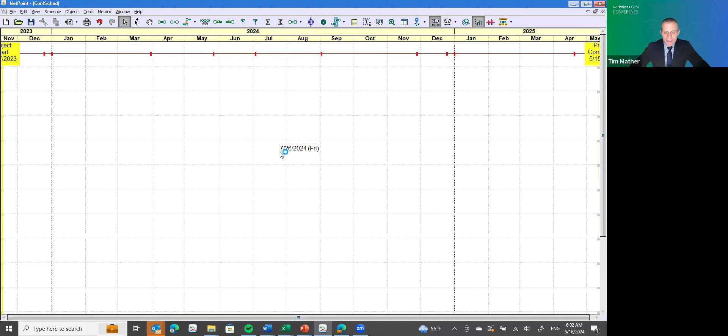Here we are in a blank canvas of NetPoint. Before we get into that, I'm just going to talk about myself a little bit and describe what we're going to do in the training.

I'm Tim Mather, as you can see from my screen, and I'm the COO of PMA Technologies. I've been involved with NetPoint since it was conceived of in the mid-2000s, 2005, 2006 maybe. We started working on it, first release 2008, and it's been commercial since then. Just a great tool. I love the way people engage with NetPoint and the way it offers a visual, interactive, graphical representation of a schedule, which is obviously an unmet need until NetPoint came along within the industry.

So today in our training, we're just going to talk about, from a tabula rasa, a blank tablet here, what are the first steps you should do when you're putting a NetPoint schedule together. And then we're going to move on to how do you add objects to the screen, and how do you set calendars if you want multiple calendars in your project. We're also going to talk about how to link objects together, how to push activities around and show how the interactivity works.

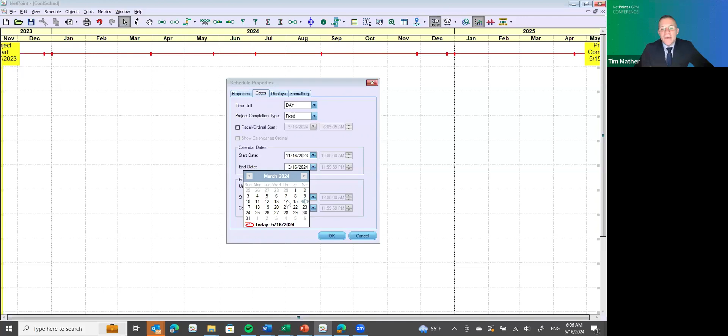One trick that is helpful to know is if you make an adjustment here, let's say that we want to go to 2025 instead of 2024, you can make that adjustment just with this arrow button here. So you don't have to go month by month through the calendar to adjust it. But if you want to go month by month, you can do it this way.

And then you have to actually pick a date on the calendar in order for it to fill in. So once you've adjusted those, if you don't have any objects yet on your screen, if you haven't placed any objects on the canvas, then you can use this autofill function. What that will do is it will adjust the date of the project start and project end so it fits within your new calendar dates. That's a little bit of a time saver.

While I'm here, I'll talk about time units. We typically schedule in days, but there are situations where you may have a very long planning window, like maybe 10 or 15 years, in which case maybe you want to go by quarter or by month.

And so the precision's a little lower, but you can get the whole plan right there on the canvas. I'm going to stick with days for our example. So now you have the blank canvas, you've got your calendar set, and you can just click OK here.

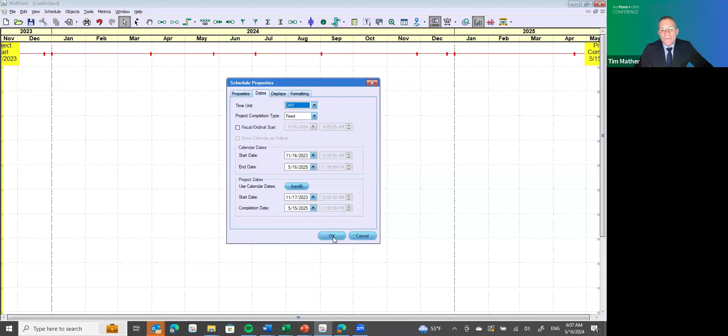And then we're going to move to look at the print layout. Why, Tim, are you talking about print layout at the very start of this project? It's because NetPoint is truly WYSIWYG, and a WYSIWYG tool means that what you see is what you get. And what you want to do is make sure that the tool is aligned with how you want it to print out at the end.

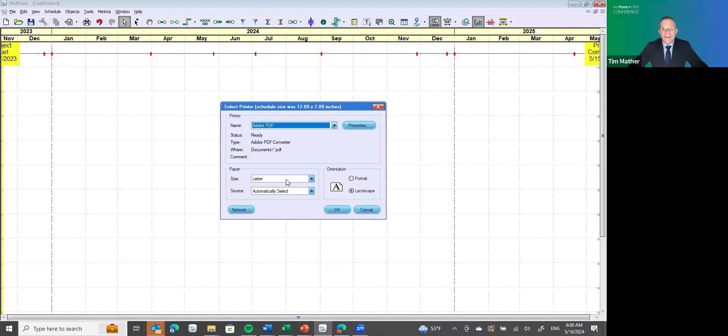So for instance, if you have a stakeholder who says, I only want 8.5 by 11, then make sure that your document here in NetPoint, your schedule, is set up to be 8.5 by 11. I usually switch to Adobe because that's kind of a universal print driver, easier to share around to people. So I'm going to leave this at letter size, but once you're in Adobe, you could make it a plotter size or whatever works. The thing you don't want to do is build a plan and then change the size of the page. So that's an important first step.

So now we have this blank canvas. We have the printer page set up. We have the calendar set up. And now we can start adding activities to the canvas.

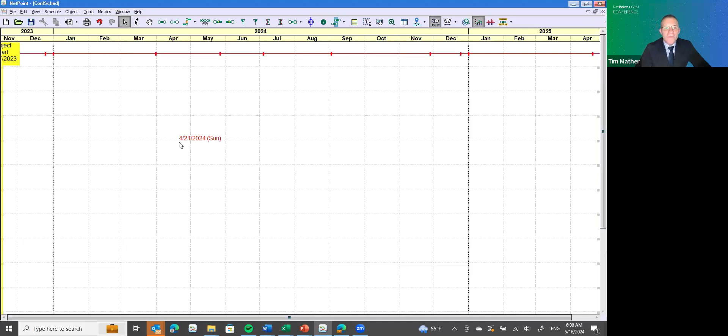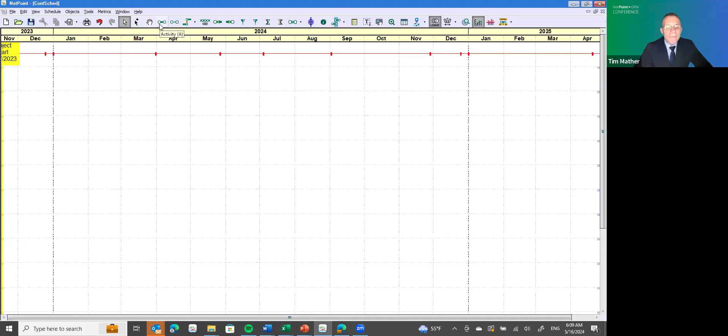So up here across the top, you'll see a bunch of little buttons and banners and icons, and I'm going to run through a few of them, demonstrating how they're used while we use the tool. So I have right now selected this arrow, the select tool. There's a select plus where you can select multiple items at the same time. And then there's also a hand to kind of move around the canvas. But I'm going to stick with this select tool and select an activity.

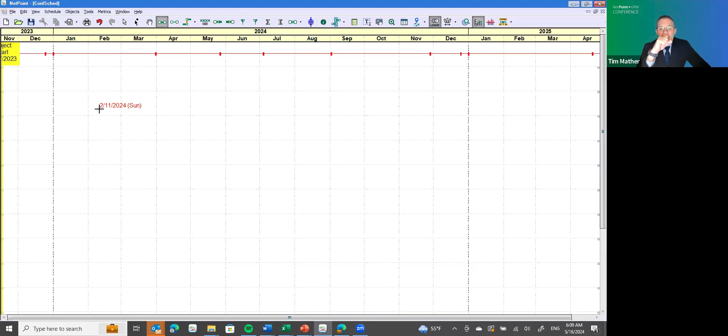Once you've done that, you come down here and you'll start to see that the crosshairs are giving you a day of the week, and they're also giving you the date. That's helpful when you're planning. You'll also see, for instance, here, 2/11/24, that's showing red, and it's red on a Sunday. That is true because we have a 5-day work calendar here, so Saturdays and Sundays are not work days, they're non-work days.

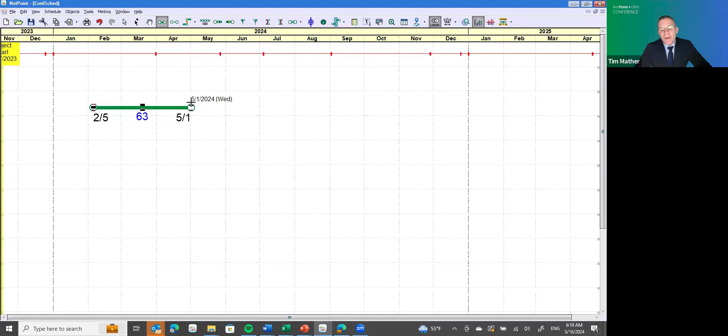Once you find where you want your activity to start, you click the left mouse button and then start dragging that activity to the right, and it's going to show you the duration and the start and finish date as you drag it out to the right. And once you've reached that target date or duration, you can just let go of the mouse and then it will give you an opportunity to enter a description for that activity.

So the description could be something creative like activity 1. Actually, no, let's not do that. Let's do something better than that. Let's do permits. So now you've got your first activity on the canvas, permits, and it's a 63-day activity starting on 2/5, ending on 5/1.

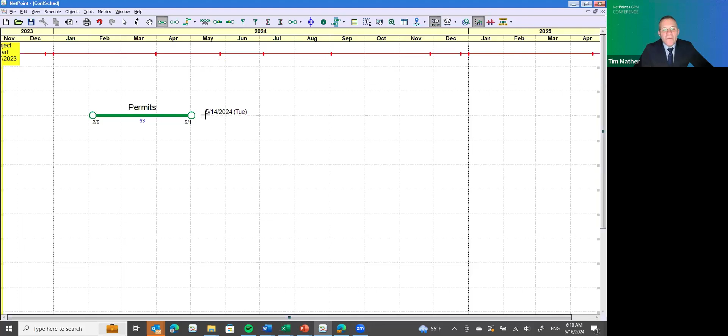Next up, let's talk about adding a second activity. You can see here, activity is already selected as your power tool. So we're going to just drop our mouse down here and drag to the right, and we'll say clear site. We got a green field here. There you go. Now we have two activities on the canvas, and one's following the other on the same horizontal plane.

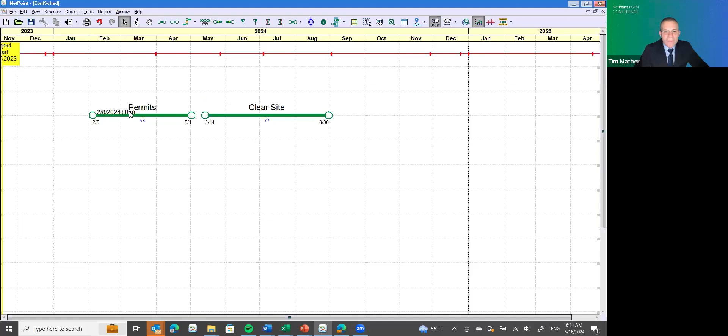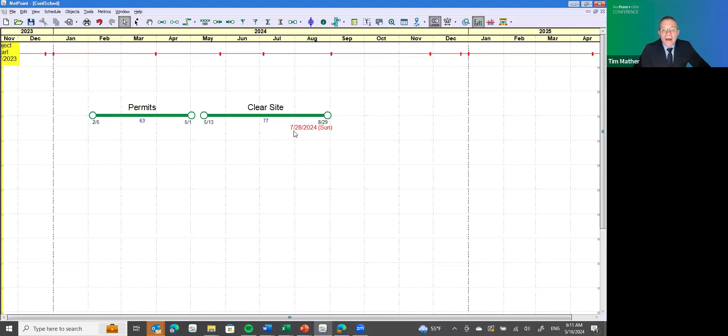That's one of the unique and wonderful things about NetPoint, that you can plan multiple activities on the same horizontal plane, which has two big advantages right off the top. One is it saves a lot of room, because if you can plan 5 activities across the schedule this way, then you're saving going 5 down this way. So you end up with a much more efficient use of space for your planning. Also, it's easier for non-schedulers to follow activity, this finishes and then this one starts, when they're one right after the other.

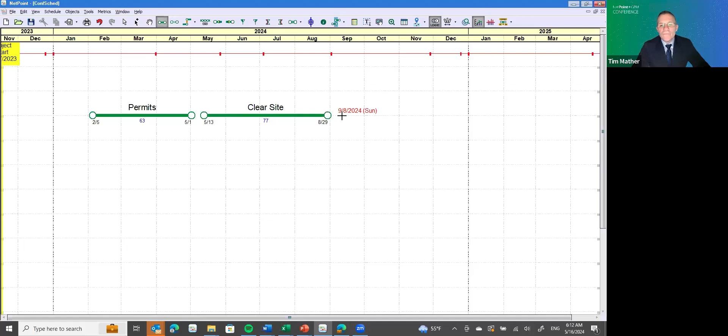So let's add a third activity. We're going to do some foundation work.

Spelling is not my strong suit, folks, so if I get anything wrong, you'll just have to forgive me. We don't have spell check yet in NetPoint, but I keep asking for it.

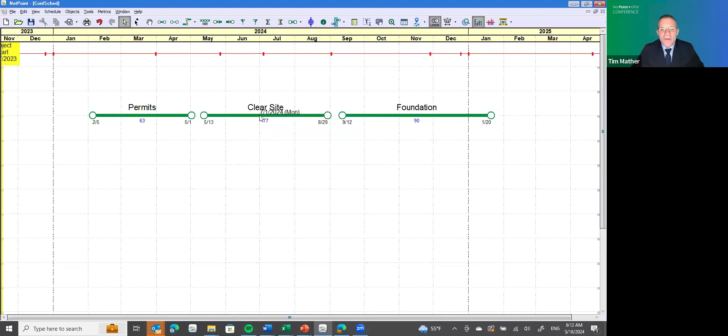So now we're going to see we've got these 3 activities. They all have start and finish dates. They all have durations. But if you grab like clear site and start to push it back, it doesn't have any impact on permits because permits is not yet linked to clear site.

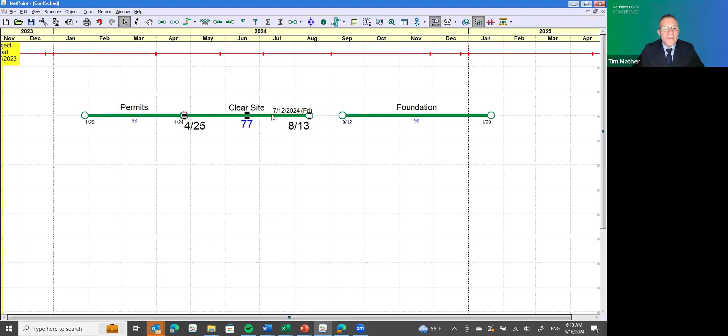Now, how do we link these together? We're going to link them together by, I like to do it this way, just drag a box around the 2 activities and click your link button up here. And now they're linked. So now if clear site starts to push back, it's going to start pushing permits because they have a relationship, a logical relationship, finish to start.

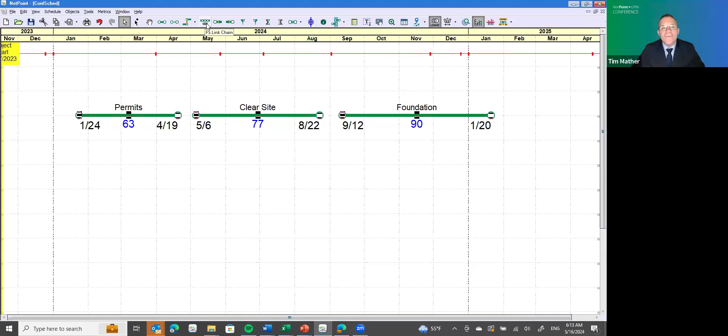Now I'm going to break that relationship just by selecting it and hitting the delete button. Now we're back to no relationships so that I can show you the link chain. So we have a finish to start chain link way that saves you some time and energy if you're linking together multiple finish to starts. That's what this little chain link thing is here. Finish to start chain link. So you click that once you've selected your activities, and then they're all linked together now, finish to start.

And so if project start date starts to crawl forward, then you can start to push permits. That'll start to push clear site and foundation. And now you have this chain all linked up. What if we wanted to demonstrate at a higher level something like the end of this? We're going to call this phase 1. So we're going to create a finish milestone, and we're going to link that to the end of foundation, phase 1.

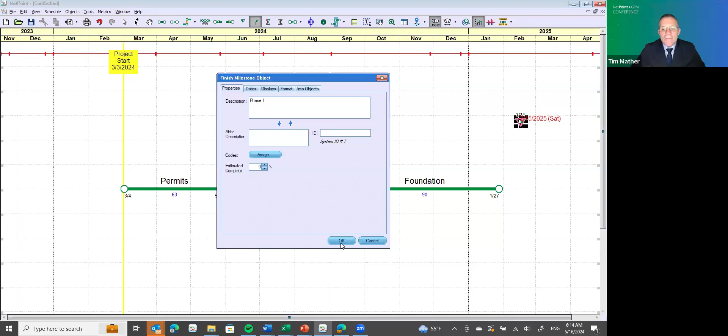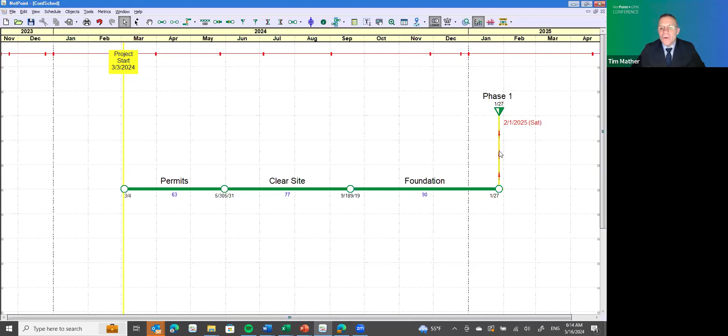So now that I have that finish milestone, it's just floating out in space. It's not connected to anything. But if I connect it back to foundation, you'll see that it's going to snap back to the end of foundation. And so it's always going to track directly with the end of foundation. As foundation goes, so goes the end of phase 1, it being the last activity.

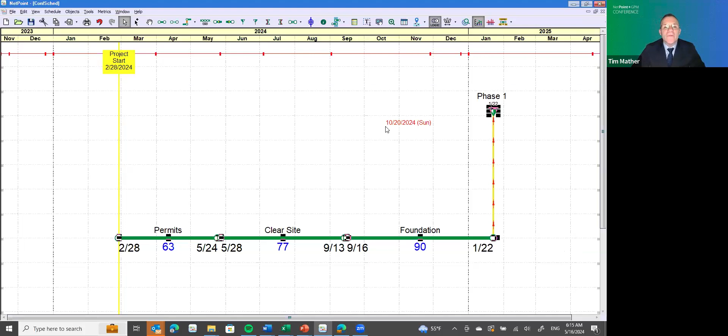So let's do this. Let's knock these down a couple more rows, and let's create a hammock that will demonstrate all the objects that are in phase 1. So you do that by clicking on this hammock tool after you've selected all of the activities you want to be in the hammock. And I'm going to start that on grid number 2. It's going to pop up there and ask for a description. I'm going to say phase 1. So now we have phase one hammock.

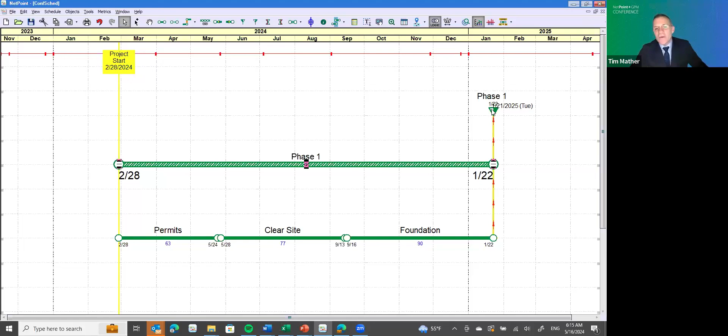We could actually move this down so it's in the mix after the milestone. So if you look at different levels, kind of, this bottom part could end up being a level 1, level 2 as you build it out. Up here, you've got a level 1 maybe, and then here a level 0 with just the milestones. So you can see almost different areas of the same schedule, different levels of detail.

So moving on from adding activities, let's talk about calendars. I want to bring up our calendar tool. You'll find a lot of this functionality right here in the tools menu, well organized there. And the verb here is usually manage, so we're going to manage some calendars. I'm currently using the US calendar for this schedule. You can use calendar days where there are no non-work days, and you can create your own calendar.

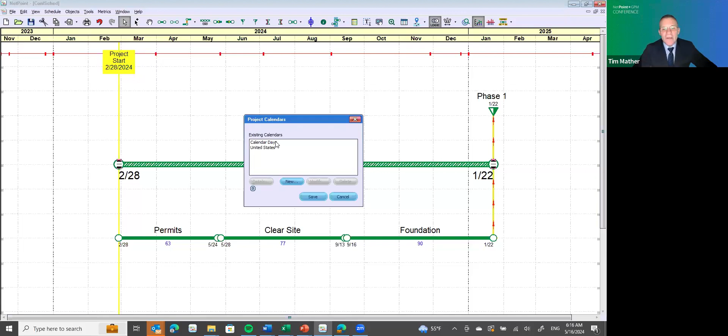So let's do that. Let's create a new calendar. And we're going to call this conference calendar, for lack of a better term. And then what you do is you use a template. So we have many countries in here with their kind of holiday schedule already pre-built.

Funny story, when I was working in Shanghai with a group, we brought up the calendar from China here, and there was open laughter in the classroom because China has a lot of different holidays that we did not have in our calendar. So that was an eye-opener.

So I'm just going to use the United States calendar here, and then you add to list. And what that does is it adds to your list all the holidays and days off that we have in the United States calendar, and it also selects the non-working days. So if you were happy with that, but in this case, because the conference is on Thursday, we're going to have a non-work day on Friday, so I'm going to leave that as a non-work day.

Also, I would be remiss if I didn't mention this really cool feature with weather days. You can go into NOAA and research like 5 or 10 years worth of weather history, and you can calculate how many non-work days, weather days you're going to have in any given month, and add it here.

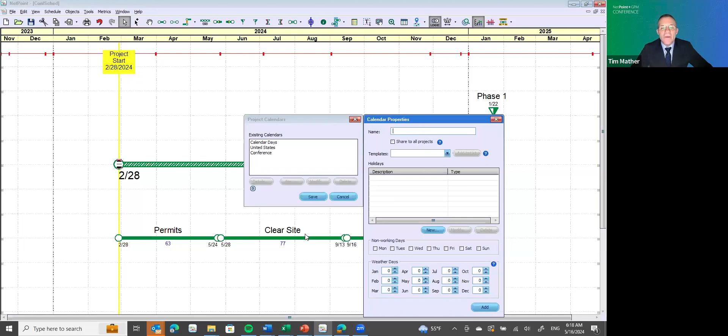And what the system will do is it will actually seed statistical sampling and drop those weather days into your calendar. Some will end up already on non-work days just because that's the way the world works. Sometimes it rains on the weekends, but it's a really cool feature that we added a few years back. So I'm going to go ahead and add this calendar. So now instead of just the 2 basic calendars, I have a 3rd calendar in the system.

And then if you wanted to apply that calendar, you could apply it system-wide or just to a particular activity. So if we wanted to apply that calendar to this one activity, then all you have to do is come in, go to your dates, and change your calendar for that activity. So now we have that conference option.

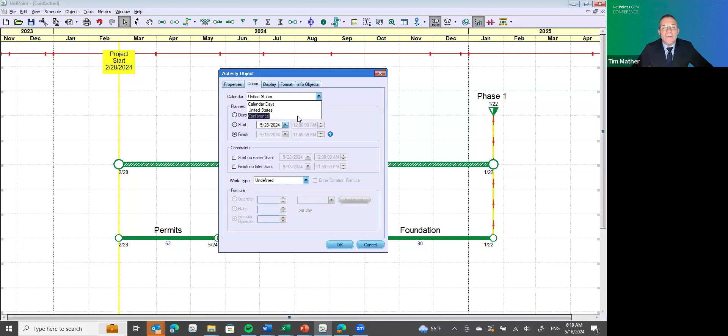So we've got a few objects. I haven't talked yet about embeds, which is a really cool feature of LDM, the logic diagram method. It's a way to do start to finish kind of relationships visually and graphically. So let's do a start to start here.

You'll notice in NetPoint, for instance, look at the milestones here. A finish milestone is colored in on the right, and a start milestone is colored in on the left. And you can see the same thing here with the start embed being yellow on the left and a finish embed being yellow on the right. So I'm going to do a start embed off clear site.

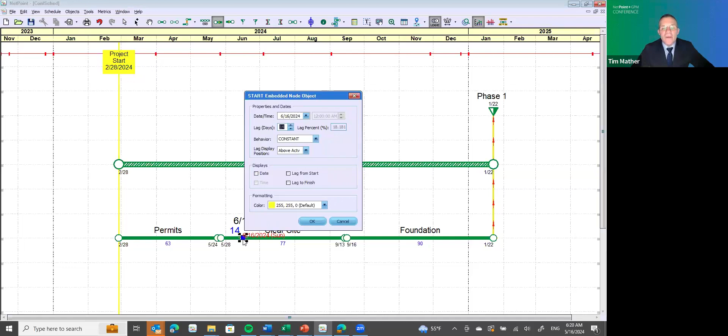And so now 14 days from the start of clear site, I now have a jumping off point for the start of another activity. And I'm going to add another activity below here in the next lane. And it can go just a little bit longer than clear site, and I'm going to call it fencing. So now we're going to grab that embed, and then I'm going to hold down my shift key and select fencing, and then I'm going to link these two together.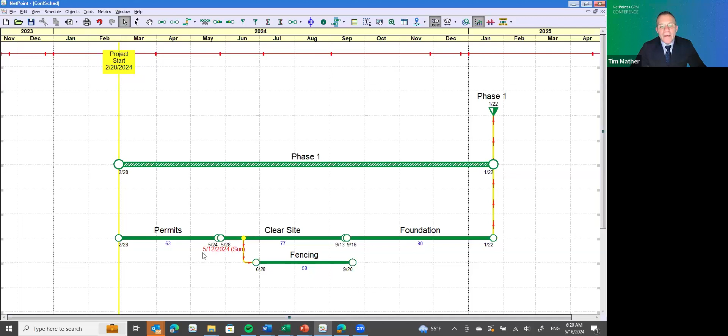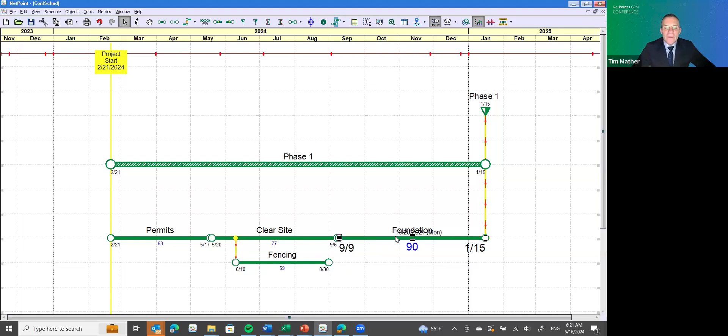So let's move on then and talk briefly about adding resources. Now, the resource functionality in NetPoint is pretty basic, so I don't want to oversell it, but it is super helpful. The one thing we don't have that I'm hoping to see in the future is a resource calendar, the ability to ramp up resources within a single activity. We don't have that functionality yet, so it's pretty much a straight line across one activity. You assign the resources, and they're going to be the same for that whole activity.

Now, one way that we've worked around that in the past is to split that activity into subsections and then apply those resources within subsections, which you can do. So let's say that for clearing the site, day 1, you're going to have 10 people on site, but day 31, you're going to have 20 people on site. You could just split clear site into 2 activities and assign the resources 20 on the second activity and 10 on the first. And you'll get that kind of ramp up effect in the resources, but it won't ever be a smooth curve. It's going to be a jump.

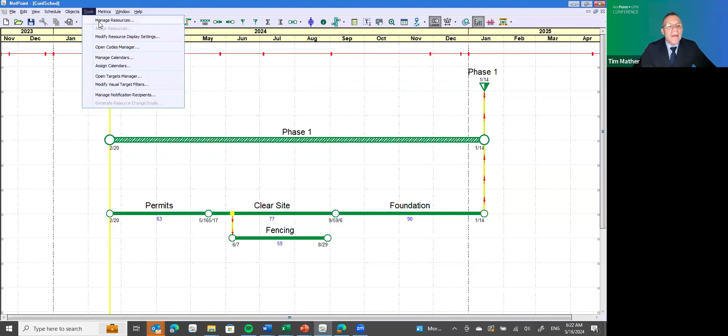So let's go back to the manage option here. So tools, and I want to manage my resources. So far, I don't have any resources to manage. So let's create a resource. You do that by hitting the new button. And I'm going to call this resource engineering hours. So we're planning ahead how many folks we're going to need in engineering working on this project.

No, they're not a commodity. They are truly professionals. And for cost per unit, I always set this at 1. And the reason I do that is because in NetPoint, you can assign any value you want to a resource. So for instance, you could have a drywall crew, or you could have a drywaller as a single person, or a crew is 4 people, and you assign those resources at whatever level you think you need to for that activity. So it could be dollars, it could be people, it could be units of material, but whatever it is, you get to figure out the math yourself, basically.

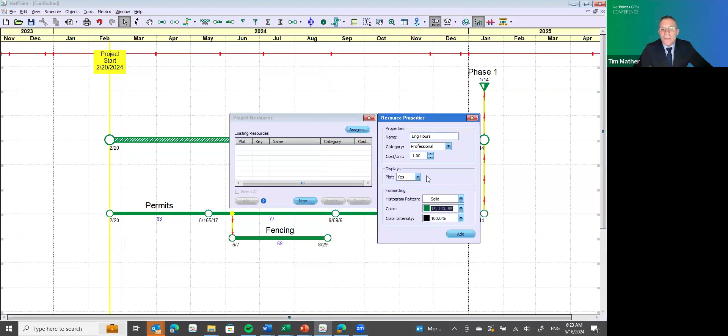So I'm going to change this to green. Yes, please plot it and add this resource. And then I'm going to create another resource called consulting. And these are also professionals. And we're going to set that to 1. We're going to change their color to be something, let's go with something blue.

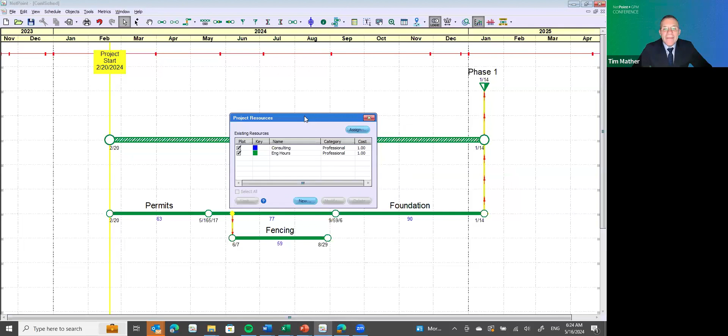All right. So now I've got 2 resources set up, but I haven't assigned them to any of these activities in my schedule yet. So I'm going to go ahead and assign consulting services first. So I select consulting services, I say assign, and you can see here, I've got consulting services selected at the top, and then listed in order of description, what are my activities.

And the only activity that's going to have consulting services is the permits. And that's going to be 5 hours a day for the duration of the permitting process. So if you say 5 hours a day, then every day that that activity is on the canvas, you will have 5 units applied to that activity.

If you say by duration, then it's going to take the total duration of 63 days for permits and divide 5 by 63. So you'll end up with a very fractional number. So things never change in the histogram as the duration changes if you assign by day, but the histogram will go up and down based on if you assign by duration. So we have that now, and apologize for that.

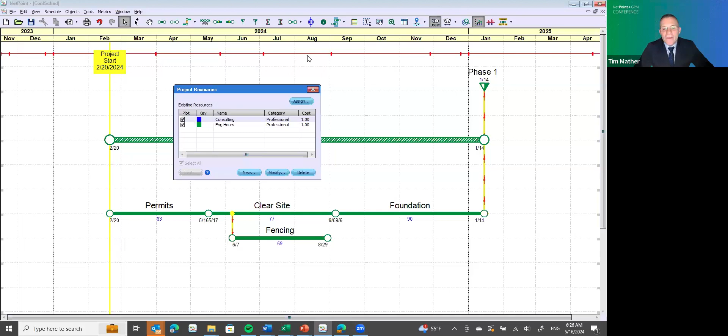We have assigned that, and now we're going to switch, and we're going to assign engineering hours. And the engineering hours we're going to have for clearing the site is 100 a day, fencing 50 a day, and foundation 150 a day. Now we've assigned those, and you say, well, that's great, Tim, but where's the histogram? You have to close out this window first before the histogram shows up.

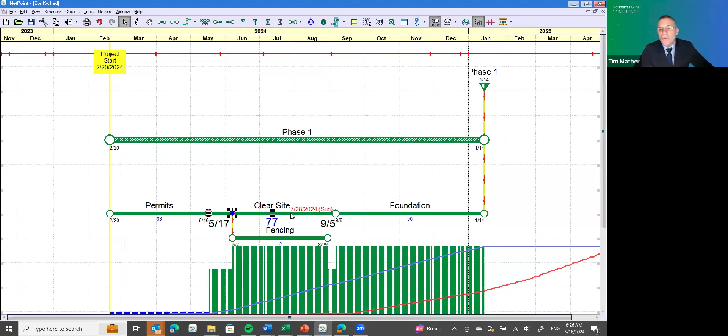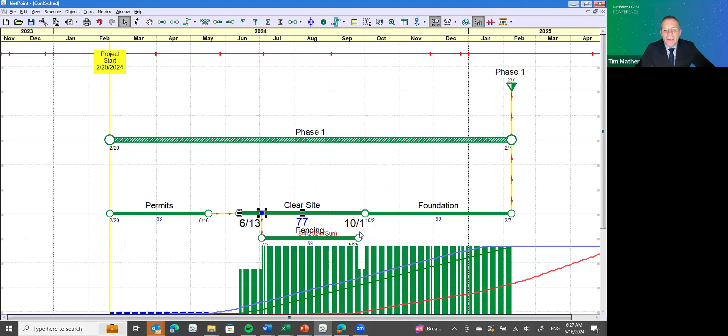And now you can see we have the histogram on the screen, and as you're noticing, here's the consulting hours. They don't show up as very many because we have so many more hours assigned in engineering, especially here where we've got these clear site and fencing both assigned some hours. So the cool thing is in NetPoint, if you start moving any of these activities, then the histogram is going to move with them. And so you can actually kind of what-if scenario, what's my histogram curve going to look like? And you'll see we've got these 3 lines down here.

These 3 lines are showing you accumulation of the resources expended within the project. And they're not giving you a lot of information at the moment. So let's go correct that. So we want to go to tools, and we want to go to modify resource display settings. That's where we kind of adjust the way things look in resources. And within that, right now we're showing the histogram, which is the bar. And then we have these 3 curves set up.

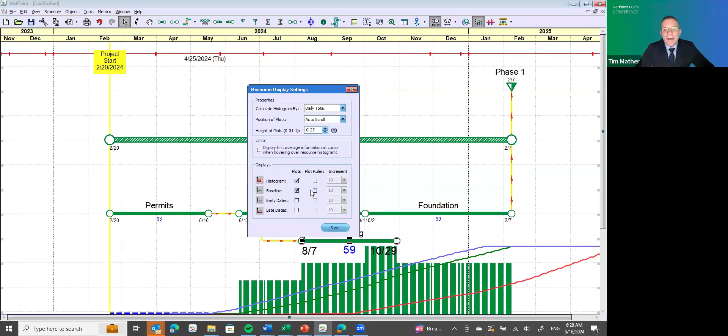We have early dates, late dates, and baseline. So the baseline is the green, that's your planned dates. The early dates is what if everything was on an early schedule, and the late dates is what if everything was on a late schedule, the latest possible. So I'm going to turn off early and late as options, and then I'm going to turn on a plot ruler for the one remaining cumulative curve, which is baseline.

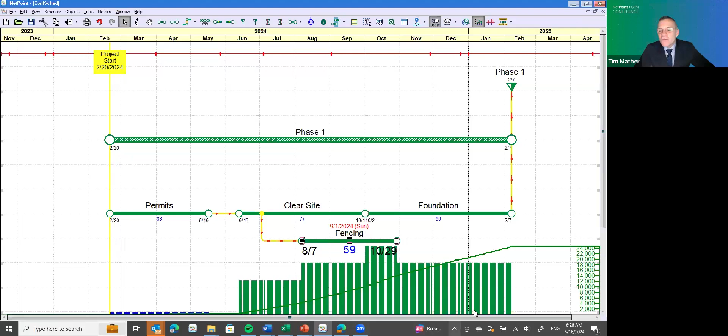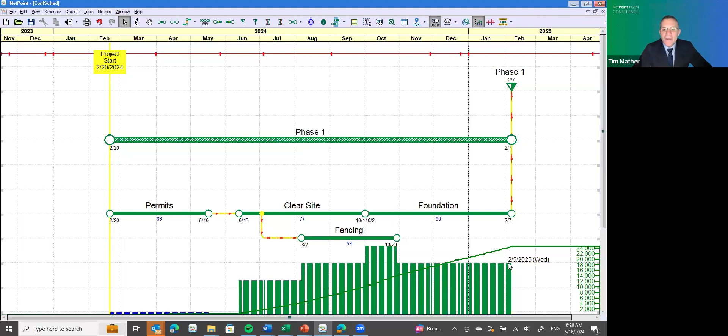And you can see here, it's apparent that we've got 24,000 total hours in this project when you add up all the engineering hours plus all the consulting hours. So it adds up quick. We're only done with phase 1, and we're projecting 24,000 hours total. If you move activities, of course, the cumulative curve doesn't change, but the histogram does change. So that's resources. Let me just make one change here.

I'm going to change the fencing activity assignment. I'm going to add something so that you can see what the per duration versus per day assignment looks like. So let me add a new resource. I'm going to call it fence install. And maybe we have this as a fixed bid. So this is going to be labor. And I'm going to make that kind of a nice silvery color, like a fence.

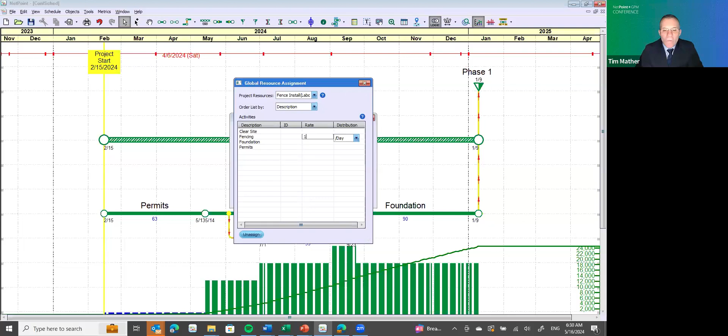Okay. So right now that isn't assigned to anything. So let's go ahead and do an assignment. We'll do an assignment on fencing. Right now it has engineering hours assigned, but we're going to change that to fence. And fencing is going to be 1,000 hours overall for the full duration. So once that's assigned,

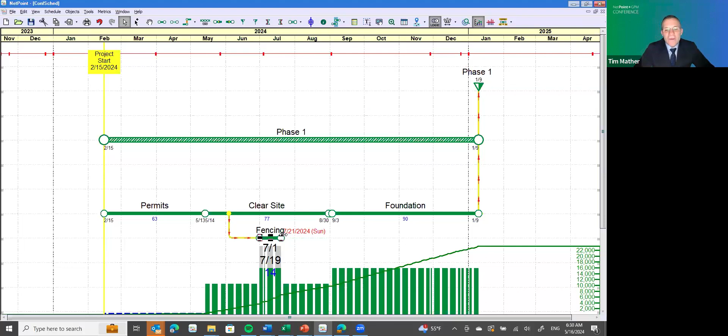now you see the 1,000 hours kind of popping up here over the top of your green hours. And what I wanted to demonstrate to you is as the fencing activity shrinks, the histogram for fencing increases because it's 1,000 hours within the duration. So the longer the duration, the lower the histogram. So that's one of the features in resource planning for NetPoint.

Up next, let's talk about the data date and the ability to compare different versions of the schedule, baseline versus your last update as an example. So if you drop a data date, that's what this little blue icon is, onto the schedule, it's going to ask you this question. So this is an important question.

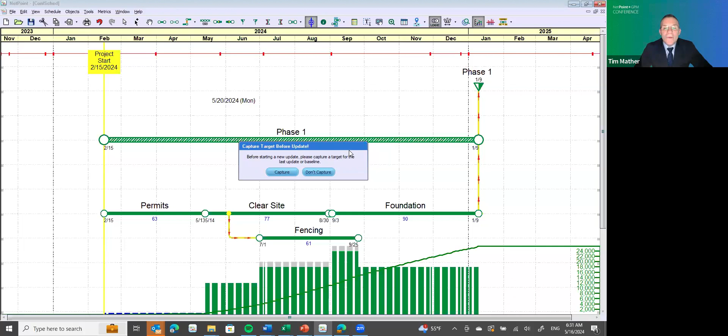Do you want to capture this? Your answer should always be yes, because this gives you the option later on to compare different versions of the schedule. So you can see that left of the data date, we have all of permits and part of clear site. So if I do a right mouse click here on the canvas, I'm going to get a menu up and I want to manage my schedule progress.

You'll see these are the two activities that can be progressed at this point, and I'm going to select both of them and say actualize them. So permits will become fully actualized and clear site will become partially actualized. Clear site has 5 days elapsed, 72 days remaining. Permits is locked in at 63 days.

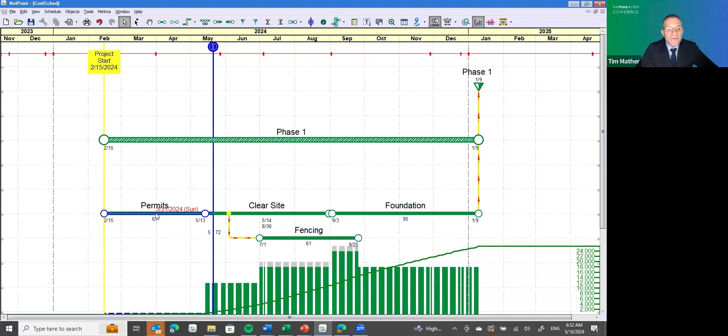Once an activity is actualized or partially actualized, you can't change the actualized portions. So permits right now is locked in place, can't change it, can't move it. It's no longer dynamic. Clear site, you can't move to the left because it's actualized at the start, but you could extend the duration if you needed to in an update.

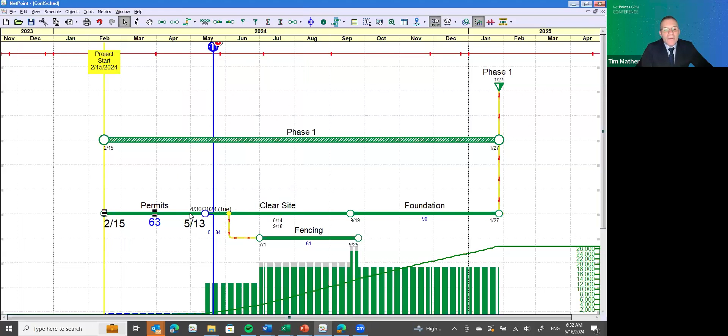And fear not, if it turns out you progressed this incorrectly, all you have to do is deactualize it, then make your adjustment. Actually, we'll have to deactualize both of these in order to make that happen. Then you can make your adjustment in permits and then reactualize.

Now, I'm sure everybody's seen these baking shows where somebody whips a couple eggs together in a pot and then they pull out of the oven this beautiful cake. That's what we're going to kind of do now, because I'm going to switch from this window to a more fully built out schedule, which has already been partially progressed here. So you can see we've made some progress, and we've got critical path, which is always highlighted in red in a NetPoint schedule.

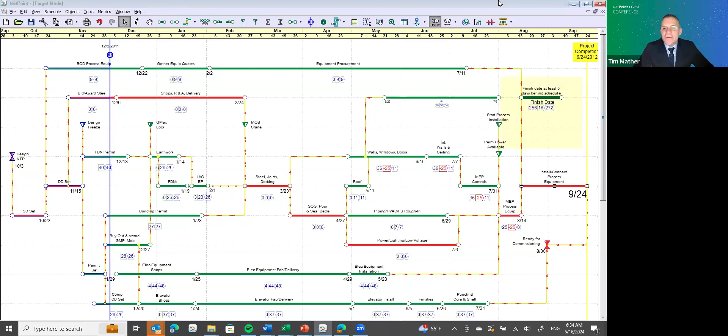Critical path passes through. So how could I compare this current update with the baseline? That's the question we're trying to answer here. So in order to answer that, I'm going to move out of the way my helpful bar for the webinar, and I'm going to click on this icon here. This is visual target mode.

And visual target mode is a really incredible innovation of NetPoint. I don't know anything out there that does this, where you can compare two different updates within the schedule, and see the shadow of the baseline stacked against the actual of the update. And we have some filters built, and the filters will allow you to compare the update and highlight what has changed.

So in this case, I'm saying if the finish date is at least 5 days behind the original baseline schedule, then make the activity larger and make it darker green. If the activity is at least 5 days early, then make it a smaller bar and make it light green. So you can see that here's a darker green, larger bar, and here's a lighter green, smaller bar. So we can know immediately that some activities are later than planned and some are earlier.

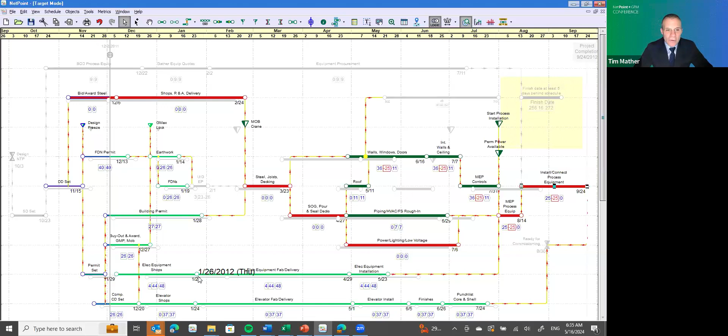And one point I want to make here is that even though we said if it's late, turn it dark green, there's one exception to that rule. If the activity itself is on the critical path, then it is not going to turn dark green, it's going to stay red. But you can tell that these activities are thicker than the activities that were just normal or behind or early.

So what is the story? What's going on in this schedule? How did we end up here? Well, originally we had planned on finishing bid award steel earlier than we actually did. So bid award steel came in late and it was on the critical path, Murphy's Law. So bid award steel then pushed shops, that in turn pushed steel joist, in turn pushed this, and eventually you get to the end of the project, which is now running late.

And I know what some of you schedulers out there are saying: well, Tim, I see zeros all along here until you get to this one, MEP process equipment. Why is that 25 days late? That's a very good question. Well, if you look, there's a pretty solid gap here between these two activities.

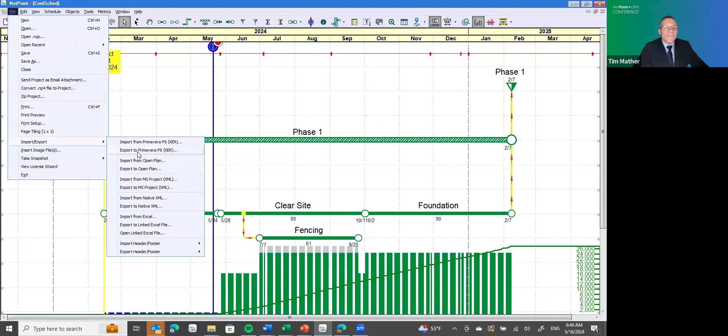So when you go to export to Primavera, there's a few things you should pay attention to back here in NetPoint itself. Now in NetPoint, let me turn on a couple of data points here for us to review. There's so much richness in the data behind NetPoint that sometimes it can be overwhelming. So a lot of folks turn off some of these options as you're working with NetPoint, as to not overwhelm the canvas or overwhelm non-scheduling experts who might not really get what all those numbers mean.

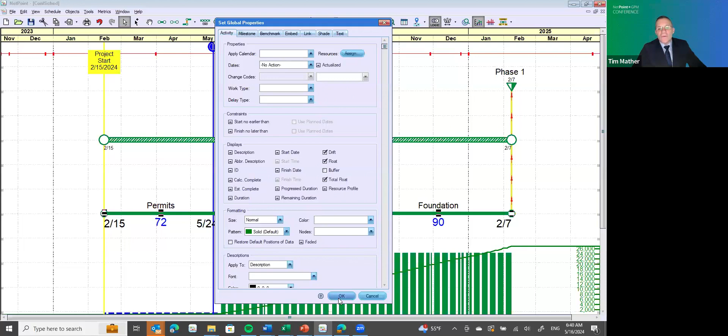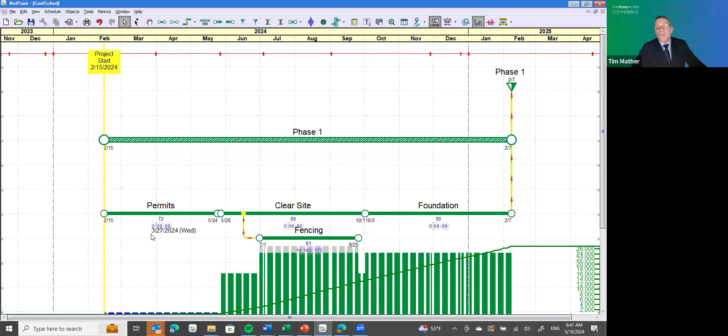So I'm going to turn on drift, float, and total float for these activities. And now you'll see that our drift is minus 68. Our float is 69, which nets you a total float of 1. I'm going to correct that by resetting our project to the start date so that these numbers look a little more reasonable. So we have a drift of 0. What is drift? Drift is like reverse float. It is how far can I move an activity to the left without impacting the start date of the project.

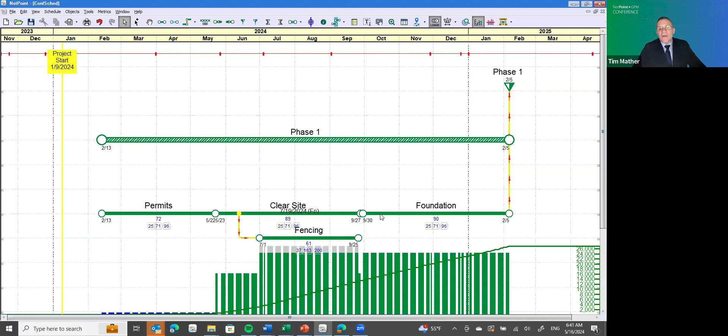So let me pull this start date back a little bit. It's going to pull the activities with it. And then I'm going to pull permits forward a little bit. So now I have how much drift? 25 days of drift. So I could move permits to the left 25 days, or clear site, or foundation, because they're all linked together without a gap. If I put a gap between clear site and foundation, now suddenly I have 43 days of drift.

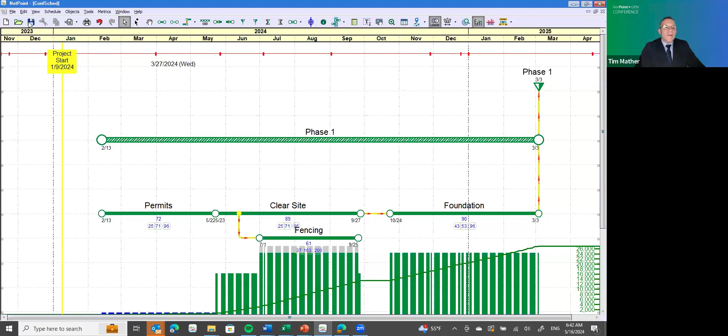So the point of all this is that drift is not good if you're going to export to P6. Because when you reschedule, push F9 in P6, you're going to end up with the activity sliding to the left and the dates are going to change. How do you correct this? Well, one thing you could do is make sure that there's no gaps between these activities. One way to do that is to go to Edit, Search, and Filter. I want to look for activities, and I want to look for all the activities that have a drift that is greater than 0.

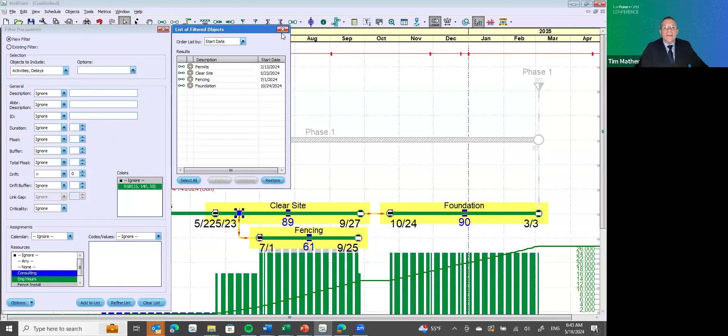It's got a drift greater than 0. I've got to look at it before I export. And look at that, I got 4 activities. Which activities are they? I'm going to highlight those. When you highlight activities using this functionality, then everything else fades away and you're just looking at the activities you want to deal with. What if I think the histogram is kind of annoying right now? Come up here to resource display, click that button, the histogram goes away. And now I'm just looking at how am I going to deal with all these?

Well, one thing is, I don't think my project start date's right. If I correct that, that corrects a lot of the problems right off the bat. So now I have 0 drift, 12 days of drift, 18 days of drift. But I really do want fencing to start on 7/1. So there's 2 ways to deal with that.

Another thing you could do is you can put a lag right into the link. And if you add a lag, then that's going to get rid of your drift.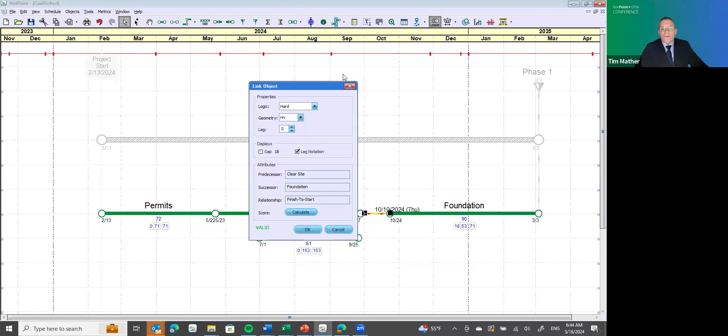And another option is to constrain the foundation start date. Double click on foundation, go to dates, start no earlier than. Now you see this little exclamation point tells you you're constrained on the left and your drift goes to 0. So now you have all those things set up correctly.

Your schedule is ready to export to P6. And you go over to P6, export. And we're going to ask you some questions. So some of these questions can have a pretty big impact. You got to tell it what name you want. Export to P6 conference.

Do you want your calendars to be global or not? I think most of the P6 admins in the world are going to say, no, thank you. I don't want new random calendars coming in globally. Do you want the activity codes to export.

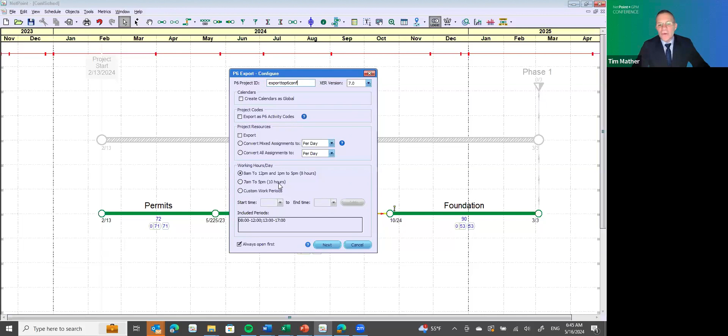So how do you want to do your resources? Do you want to convert them to per day? And then we have shift work. This is from Sydney at Jacobs, who was one of the rock stars of P6 and NetPoint for many, many years, now retired. But he had a problem where he needed to be able to put in shifts as he exported from NetPoint to P6. So we created this functionality for him.

So I'm just going to go ahead and say, yeah, I want to go ahead and export it. This is going to export everything. It's going to export the logical ties, create an XER that has resources, resource assignments, logical ties, everything, durations, dates. And then you just import that into P6.

The other cool thing is if you take that same schedule and create an XER and bring it back into NetPoint, it will remember that all of these activities go on this line and what color activities are and all that stuff. So it comes back in pretty good shape, which is a super helpful feature.

Let's talk about exporting to Excel. This is another very helpful feature. I go to import export and I want to export to Excel. This creates a linked Excel file, and I'm going to show you what that means in just a minute. I'm going to export everything, so just shoot everything out there and let's take a look.

Yeah, sure I am. Okay, I guess I didn't click it. Oh, look who didn't close his Excel. All right, one moment, please. Well, it wouldn't be a demo if everything went perfectly, right? Okay, let's retry this. There we go. At long last, our much promised Excel export should be on the way. Here it comes.

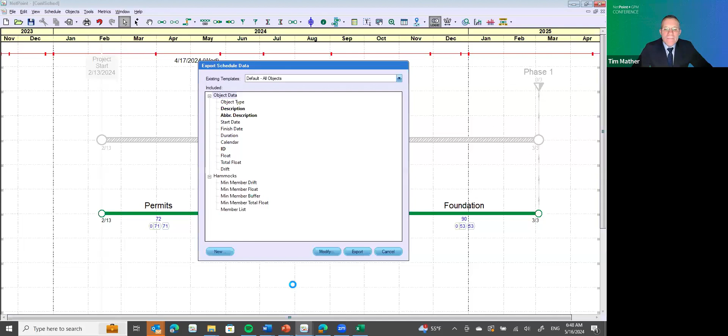So you can see here, all the object data has exported from NetPoint to Excel. And the reason that it's a linked spreadsheet is all these bolded titles you can actually change in Excel. So I'm going to change this one to phase 2. And then you go to add-ins and click this little squiggle.

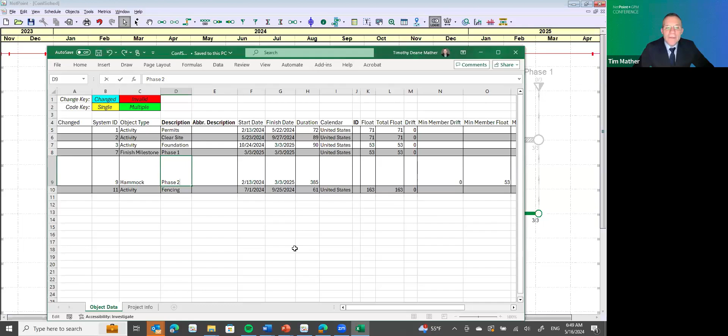And it does the update for you back in NetPoint. So I go back to NetPoint and I think maybe I made a mistake. But that's the basic functionality there. So that's import export, Excel, P6, and I'm ready for questions if anybody has questions.

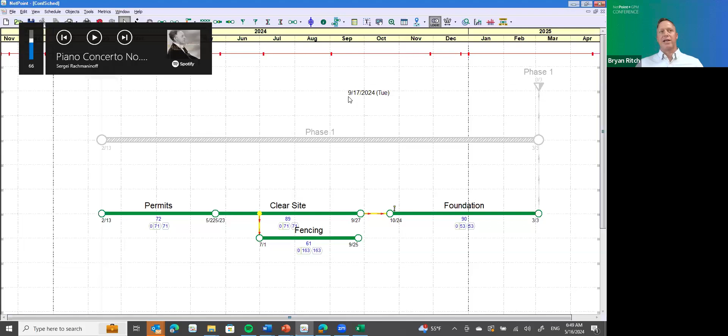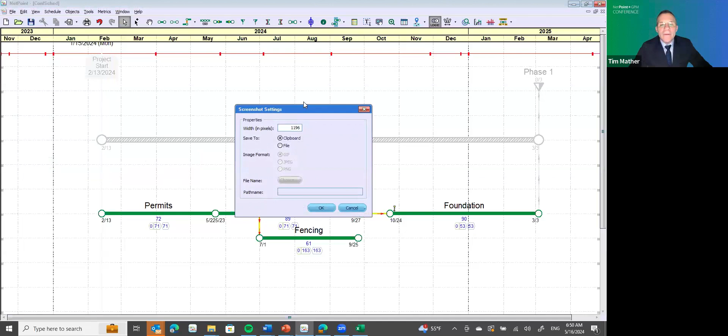So first question is, can you take a picture or snapshot of your schedule to share it in another file? Great question, thank you. Yes, under the file menu, if you go to take snapshot, you have two choices. You can do it the full schedule, or you can take a part of the schedule. So you can say, okay, I want to send this to the clipboard, and then once your snapshot is done, then you can paste it into PowerPoint or anything you want.

Excellent. Next question. How can you show drift and float as a default for all activities? Good question. Up here in objects, if you, at the start of your scheduling process, go to set properties for new activities or new objects, then check drift and float. For every new object that you create, drift and float will show.

Next question from Samir: Do the durations of activities change when we change to a new calendar?

Yes. If you change the calendar and it has a different number of working days, the duration will change.

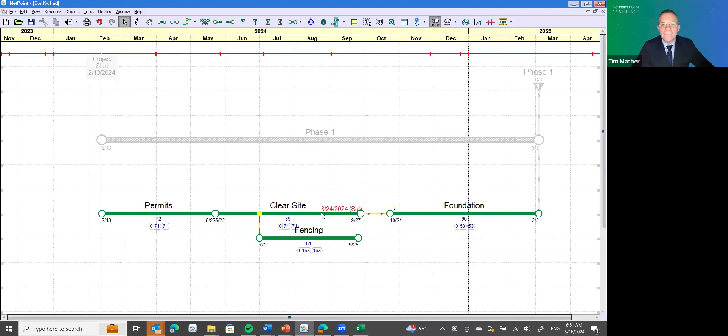Next question: What happens if you change the page size after you've built a schedule? Well, it's not the end of the world, it's just kind of a painful process. If you make it bigger, it's not so bad, but if you make it smaller, things end up kind of scrunched together.

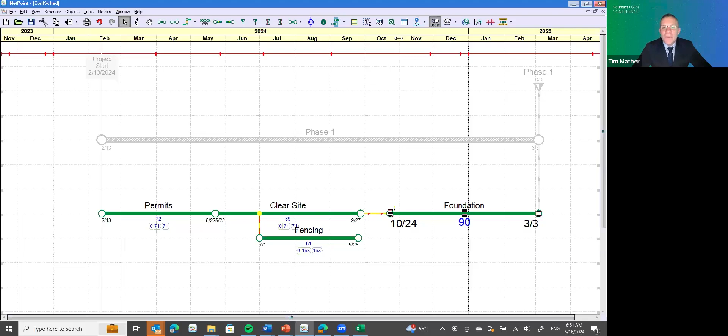Let me give a quick demonstration of what that might look like. You can see if I make this page smaller, all of a sudden things don't look the same, right? It's going to be harder to make this look good for a presentation.

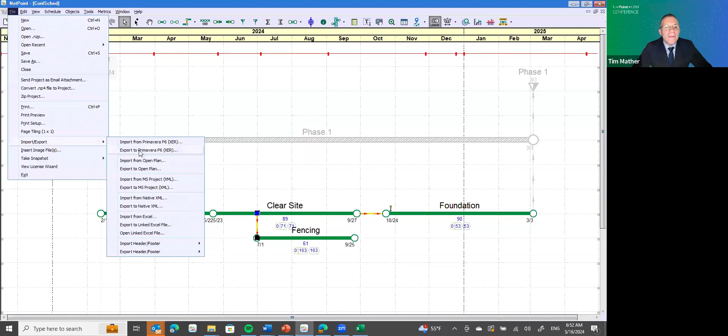Next question: Would the steps to export to MS Project be the same as to P6? They're very similar, but fewer questions, so it's not as detailed a process. If we export to MS Project, we basically just create the XML file for you, so we don't ask about shifts or resources or that kind of thing.

Another question: What is the market adoption for this software? DOTs are stuck to P6. Yeah, not just DOTs, the whole industry. Although I've got to give a shout out to our friends at FACA, who convinced the Canadian ministry to accept NetPoint schedules instead of just MS Project or P6 schedules. That was pretty cool.

But NetPoint is not actually a replacement for P6. It's a tool to help visualize the schedule, help people collaborate, see things interactively, and do what-if analysis. So we're complementary to P6. I know for sure that lots of DOTs around the country have adopted NetPoint to look at big programs and schedules, and to bring clarity to folks who aren't subject matter experts in scheduling.

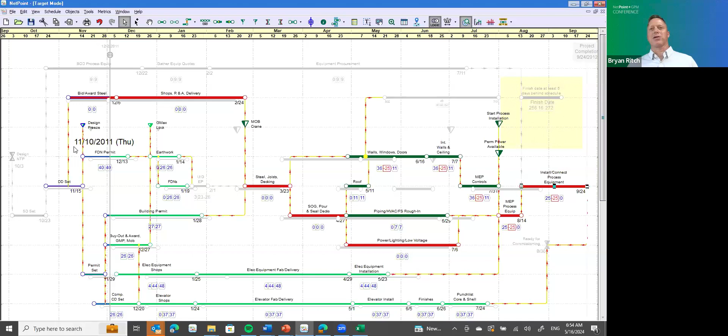Maybe need to give some more information. One more question: Can we set up a color for each resource? I'll let you answer that, but it's pretty easy. Yeah, each resource can have a color, and also activities or groups of activities can be colored.

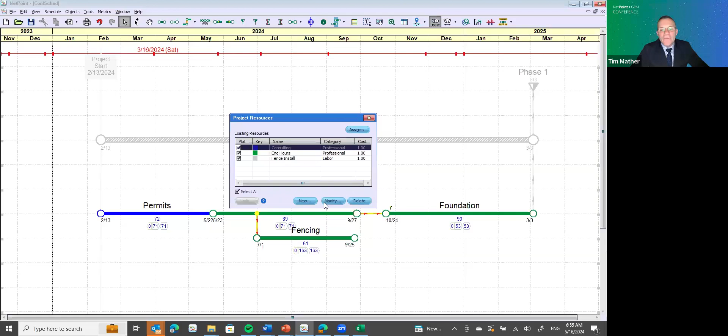For an individual activity, you can just go to the format and change the color. And then for resources, when you're creating the resource itself, you assign the color. So if you wanted to, you could change the color of this resource to yellow, for instance.